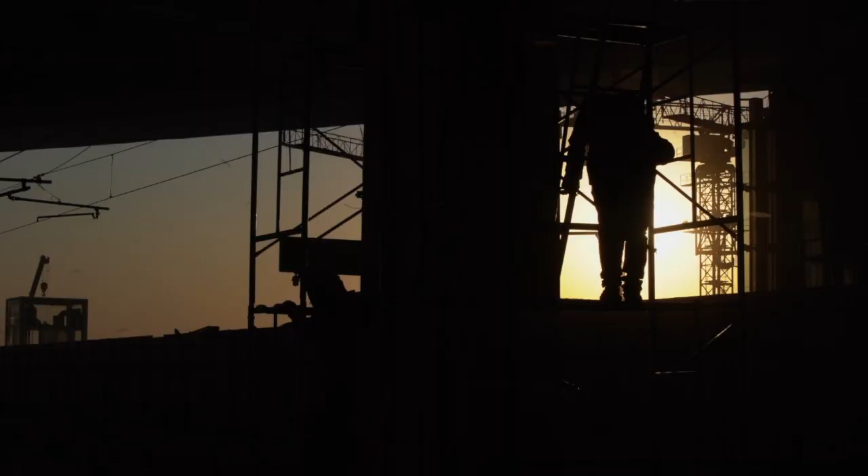Using manufacturing and creating new materials are how we build and reshape our planet.

For Jiangsu province in the center of China's east coast, water is a lifeline. When the Nanjing Yangtze River Bridge was built, it became a part of Chinese history.

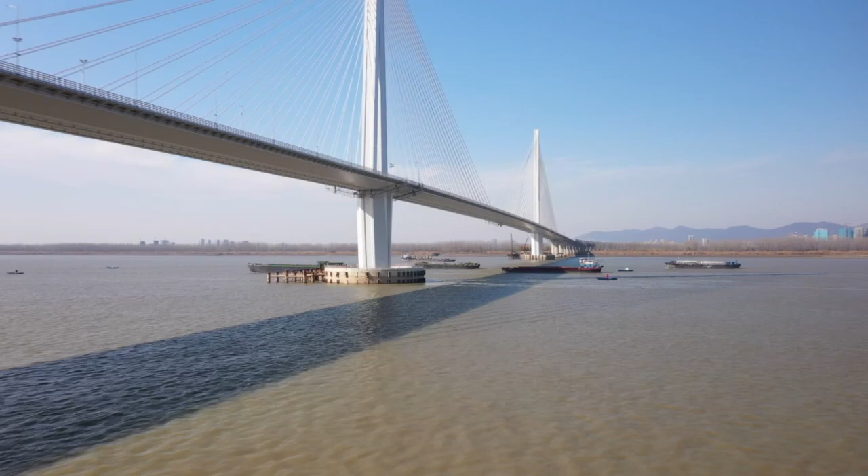13 kilometers away, the recently built Nanjing Jiangxinzhou Yangtze River Bridge set a new record. With a main bridge stretching for 1,796 meters, it is the longest steel-concrete composite cable-stayed bridge in the world.

The massive span means strict load limits had to be set. The bridge had to lose half of its weight to achieve a perfect combination of mechanics and aesthetics.

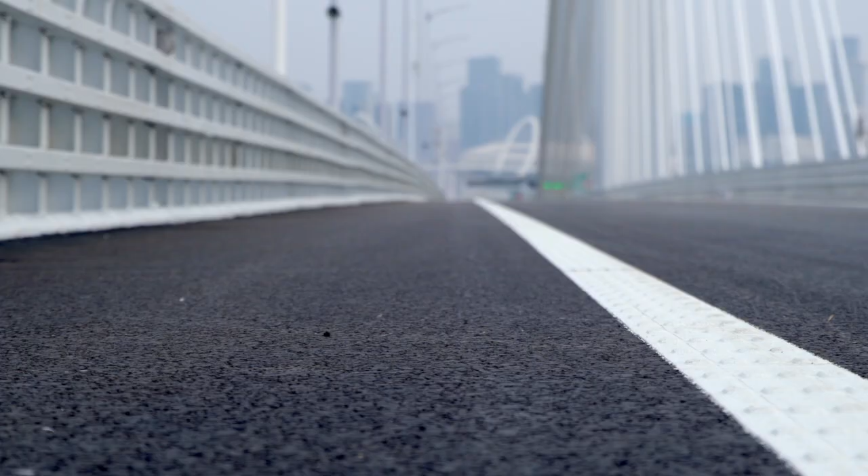The new material weighs 2.65 kilos and is now being tested to determine its maximum bearing capacity. The engineers are challenging the impossible to find out exactly how much weight the bridge needs to shed.

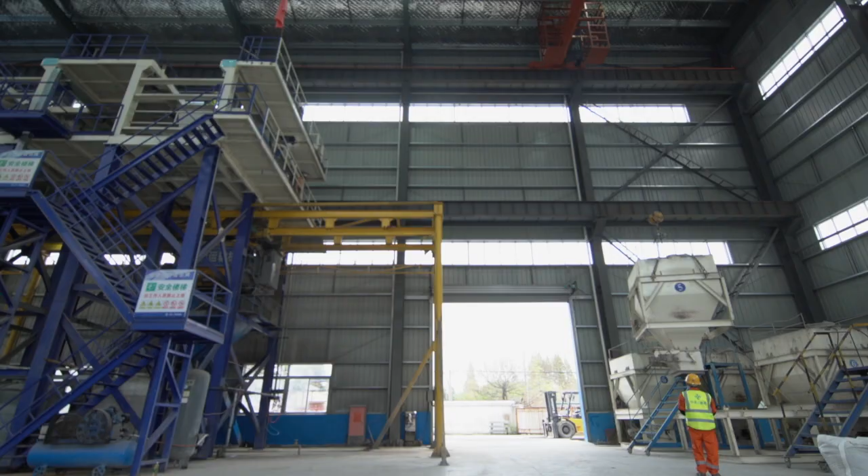Behind every engineering feat is a concrete processing factory just like this one. Over 100 years ago, the invention of concrete led to a worldwide revolution in construction materials. This was followed by a boom in infrastructure, which was considered an indicator of a country's development.

Today, concrete is the driving force behind China's construction surge, and that, in turn, gave rise to a new type of concrete material.

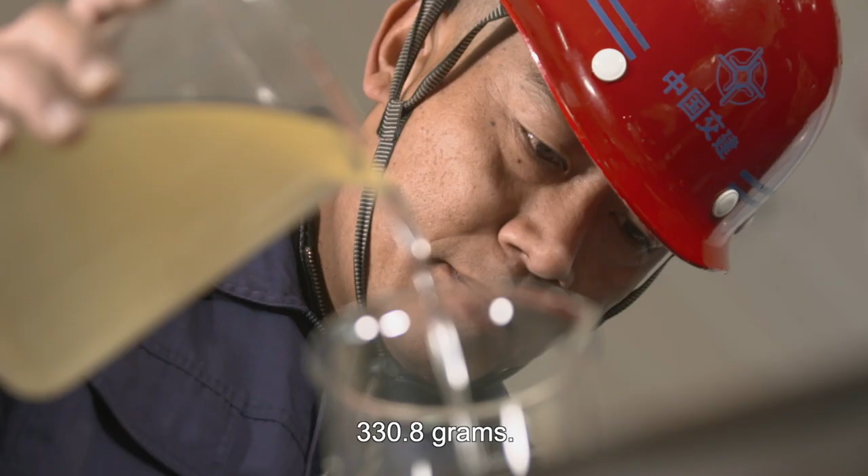Reactive powder, steel fiber, fine sand, gravel, and other materials. The R&D staff have found the exact ratio needed to reduce the bridge's weight.

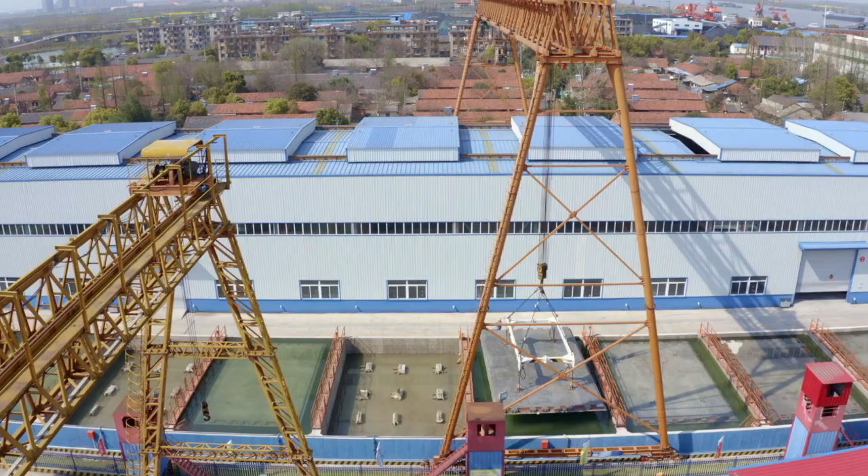A prefabricated section of bridge deck 11.3 meters long and 6.9 meters wide is produced using the new aggregate reactive powder concrete.

After being preserved in water for 15 days, it will be left to dry. Compared with traditional concrete bridge decks of the same size, each section of this new type deck weighs only 45 tons as opposed to 70, and its thickness has been reduced from 28 centimetres to 17 centimetres.

The sections will be gathered, connected and spread out to build a passage to the future. This is a new beginning.

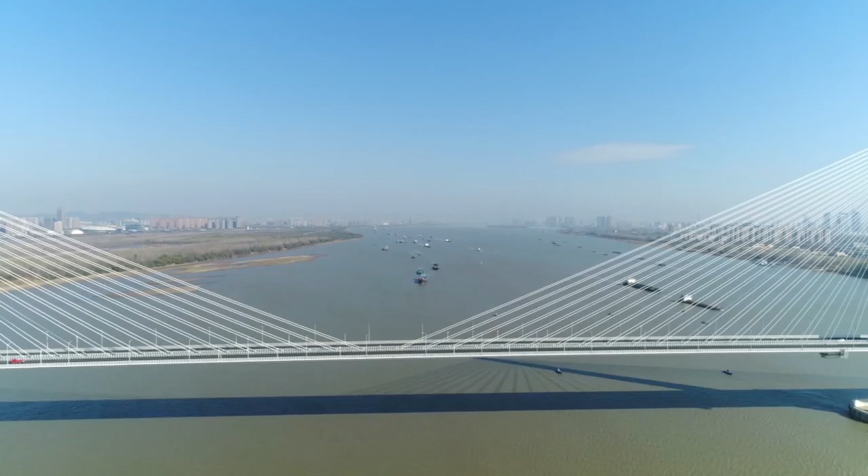494 sections of the new material deck are hidden between the steel box beam and the asphalt road. Stronger materials enable greater capacity. In this case, it means the bridge can be made lighter by a staggering 15,000 tons, 40% of its original weight.

The now much more slender Jiangxinzhou Yangtze River Bridge is about to undergo a bearing capacity test, a kind of birth checkup.

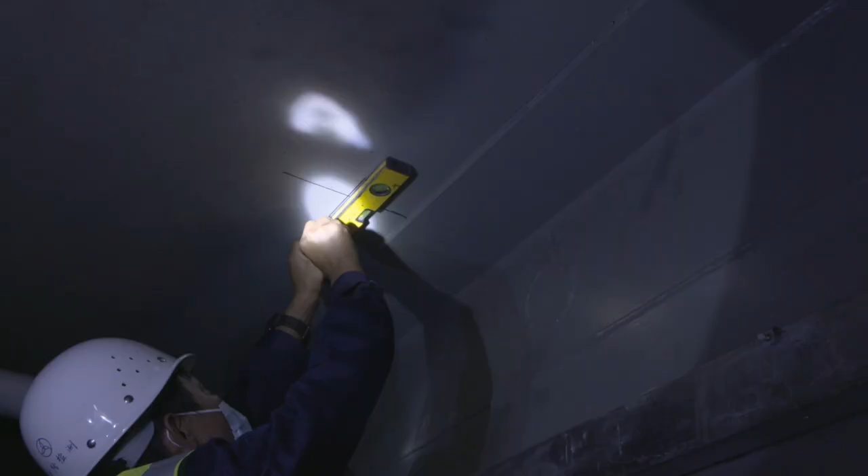244 stress points will enable us to see instant changes when stress is applied to the bridge during the bearing capacity test. Every tiny detail regarding the new material's performance will be tested.

Preparations for the test begin. A total of 38 heavy trucks, each carrying a 40-ton load, are ready to roll.

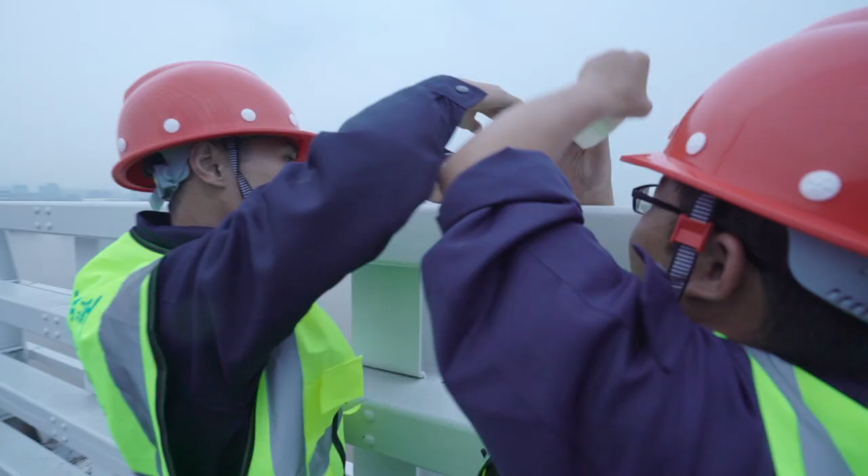Wind speed monitoring, position observation, cable force tests. Every change on the 4,134-metre bridge is being recorded and monitored down to the millimetre.

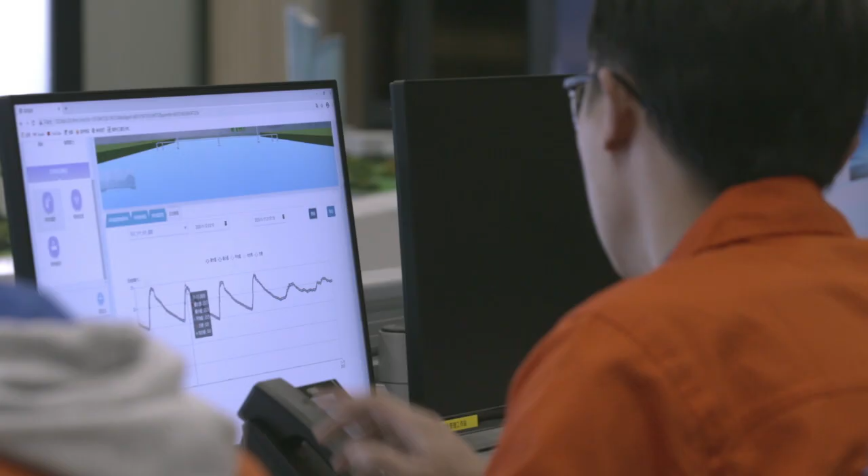Today, the Bridge Health Monitoring Centre goes into operation for the first time. During the bridge's anticipated 100-year lifespan, its every breath and heartbeat will be monitored here round the clock, all year round.

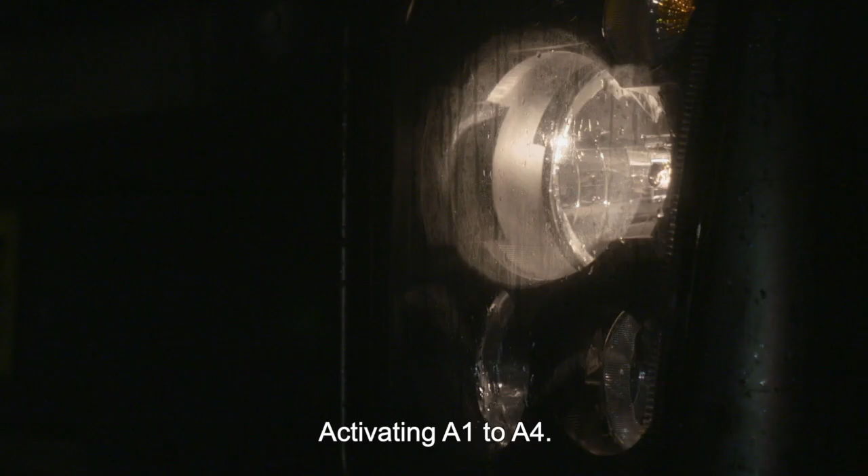The 38 trucks move to the middle section of the bridge. The total weight is 1,500 tons, equivalent to 1,000 cars passing through at the same time.

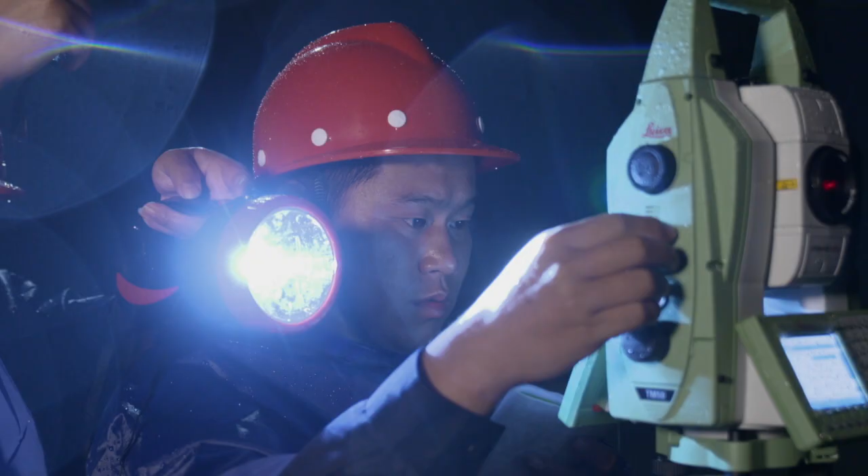In an extreme bearing capacity test like this, each new load puts more pressure on the bridge. This will cause it to bend downward and create tower deviation. Data measured on site needs to match the calculations to ensure the bridge passes the test. Only then can it be put into operation.

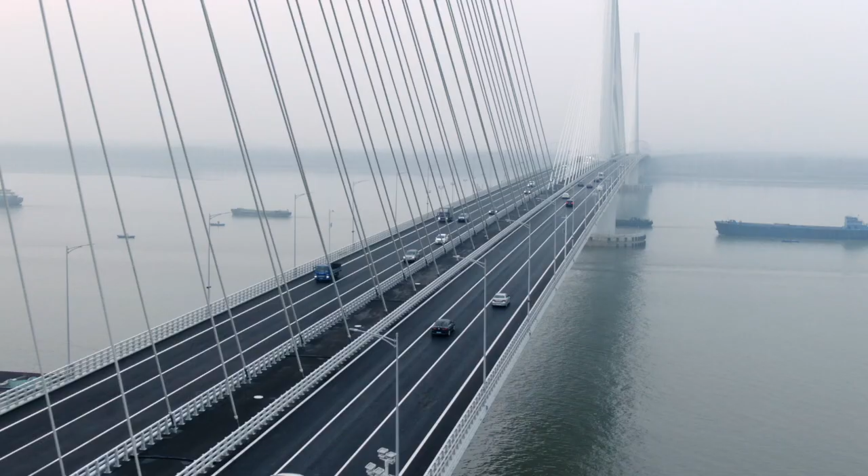From this moment on, the bridge begins to fulfill its century-long mission. Nearly 200 bridges built over the Yangtze River in the better part of a century have led to the creation of a highly efficient transportation network in China, boosting economic ties between the country's south and north. The bridges over the great rivers are a crowning achievement in China's development.

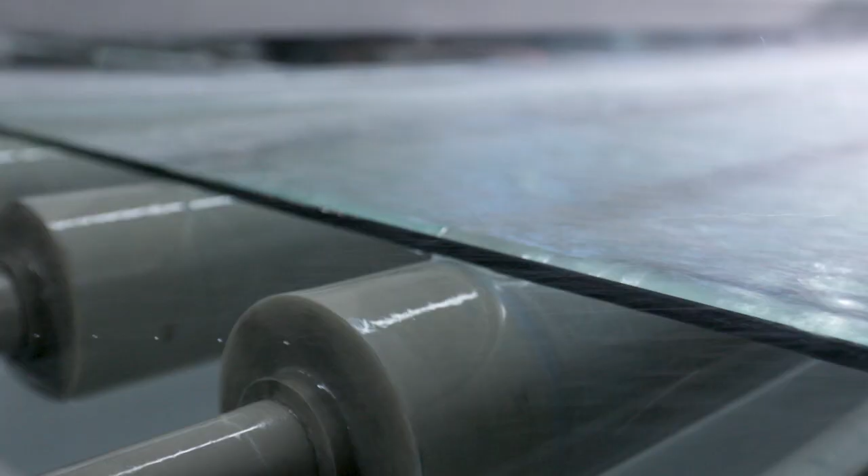Glass, a material almost as old as human civilization itself, reflects the passage of time like a prism. Over the last 200 years, the use of glass in architecture has created more possibilities in bringing natural light into living spaces.

The sunbird is the symbol of the 1,000-year-old city of Chengdu. It was unearthed as a 0.02mm thick artifact from 3,000 years ago, and it's now being showcased to the world at a major international sports event.

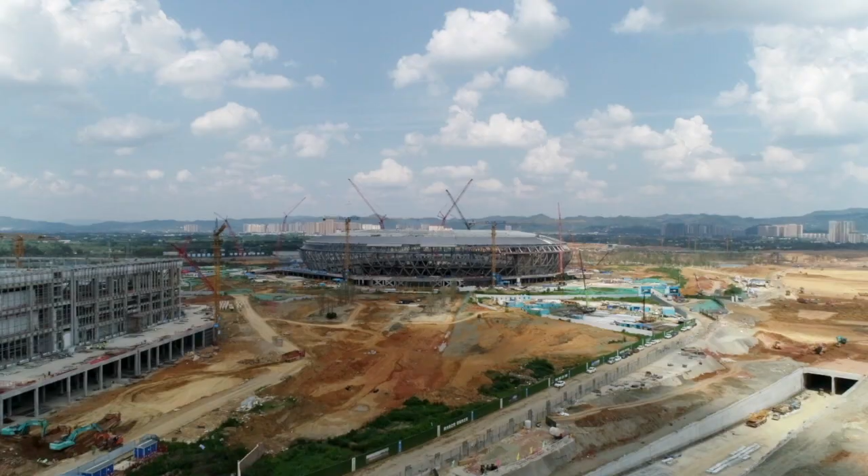The 40,000 capacity Dong'an Lake Sports Park will be the main venue for the 31st Summer Universiade. Its outline is gradually taking shape.

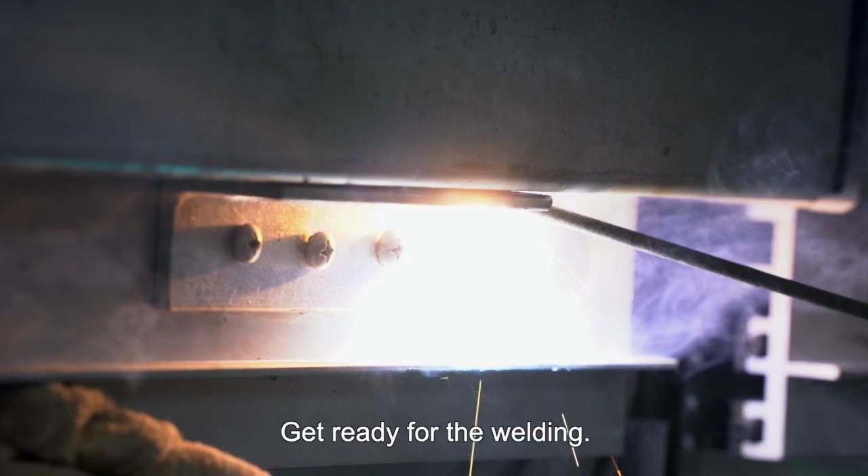The stadium is in the shape of a giant flying saucer. Workers are now installing a 6-metre glass piece that will serve as the saucer's porthole. Atop the skylight of the stadium, workers will use 12,540 pieces of glass of various sizes to enlarge a tiny sunbird by 2.7 million times. The result will be the largest sunbird logo in the world and a spectacular sight from both below and above.

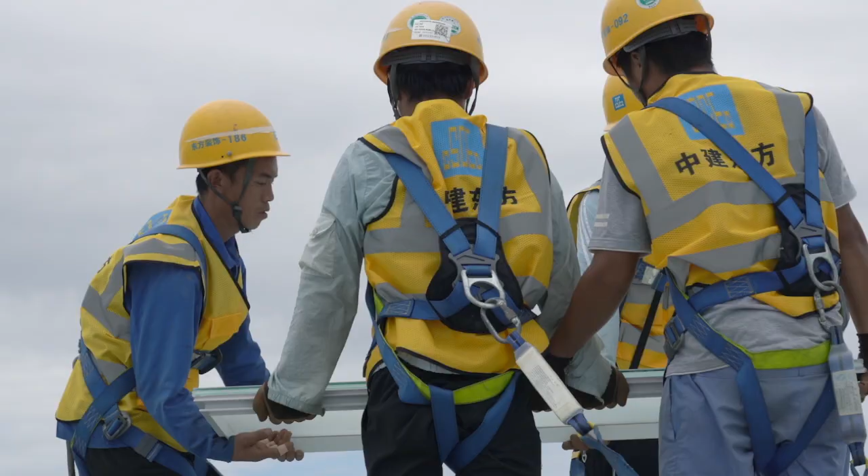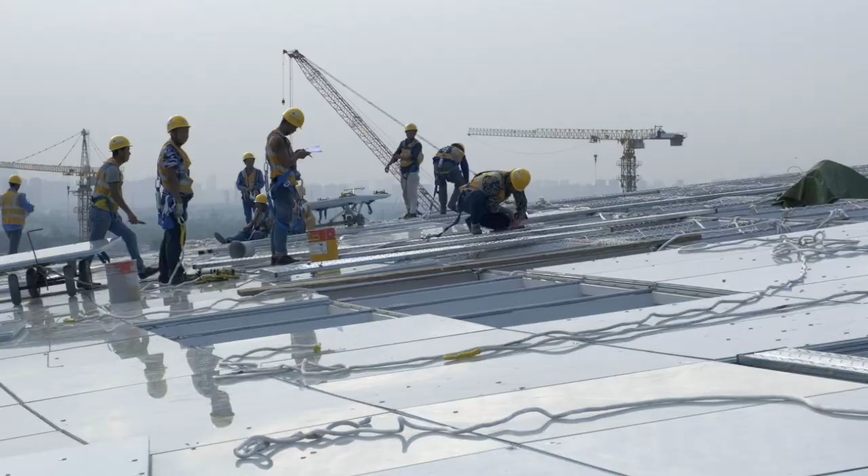Every piece of glass is precisely numbered, then put in a designated spot. Operations in all sections are carried out simultaneously, a method that's both efficient and error-free.

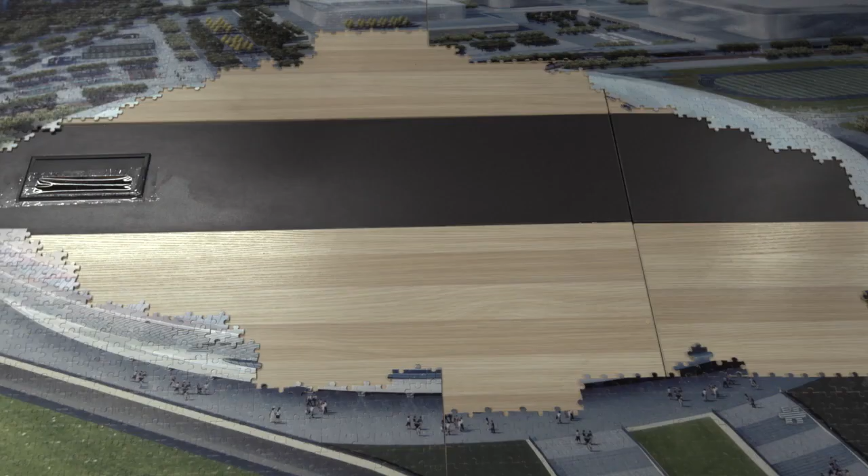12,540 pieces of enameled glass have now been installed. It took 35 days and was completed with a 99% precision rate. The Sunbird is finally airborne thanks to the labour and wisdom of the team. This sophisticated building technique will bring infinite possibilities for future construction projects.

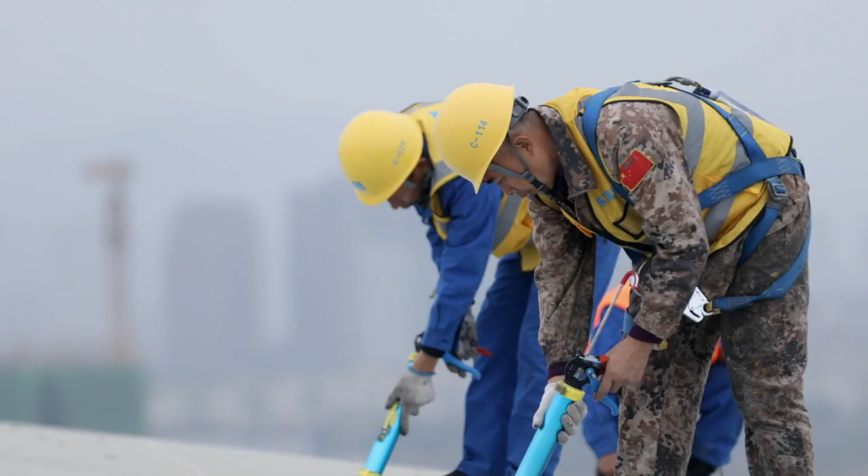Now comes the final test. Chengdu is a city of year-round humidity and constant rain. The 27,000 square metre skylight needs over 40,000 metres of glass cement. As well as guaranteeing the pattern's lighting and display, the roof must also be waterproof. Every single seam on this gigantic skylight will be tested.

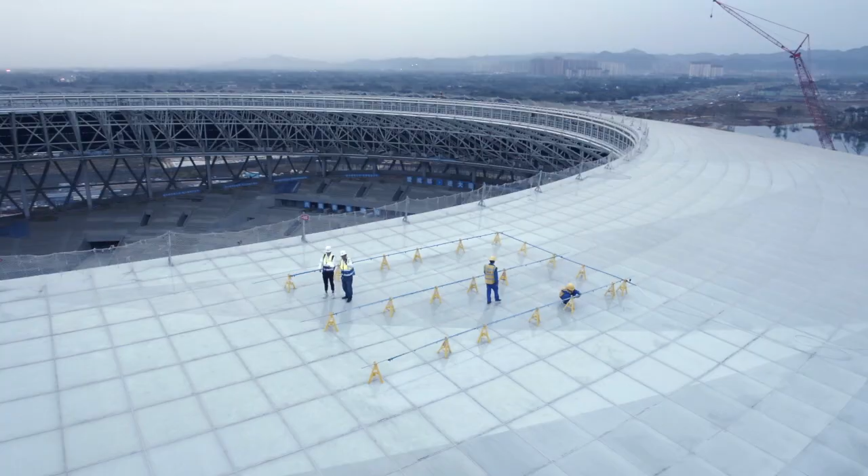The 24-hour water pouring test comes to an end. The roof did not let one drop of water through.

After being blown up to 2.7 million times its original size, the Sunbird, a symbol of Chinese cultural heritage, comes to life again. More than 3,000 years on, a miracle is reborn.

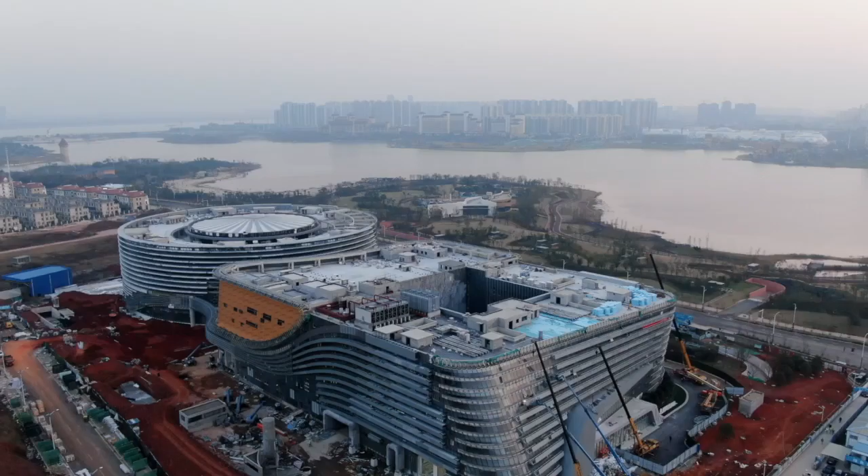The same sky the Sunbird flies across is also witnessing other miracles. At the Nanjing Civic Centre, glass is being used to keep the city's 1,000-year-old poetic beauty alive. Construction is now at a critical point.

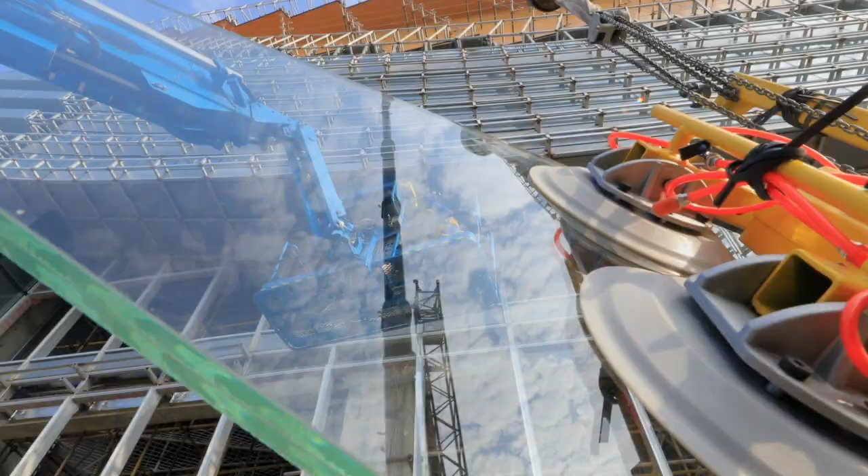In order to give the structure a flowing quality, builders used almost every type of glass curtain wall currently available for this installation, which has no previous example to model itself on. Breakthroughs in modelling technology and construction techniques made it possible to finally realise this bold design that had been shelved for 7 years.

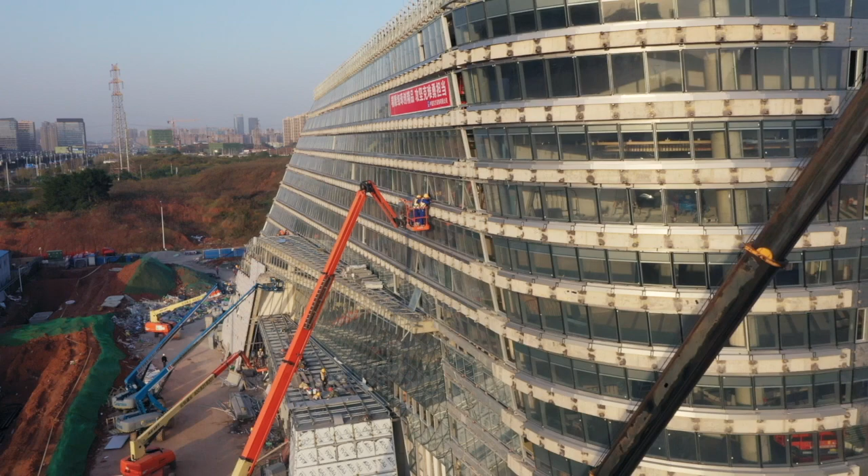The builders will use a total of 8,255 pieces of glass to assemble the exterior, involving 7 systems, 25 designs, and 5,525 sizes of glass materials. The complexity of the installation is growing exponentially. Next, they will attempt something that has never been done before, making 180 tons of transparent glass float above an empty space inside the building.

With a stayed structure, load-carrying points are created in the air. Glass is then attached to these points, creating the illusion that it's floating.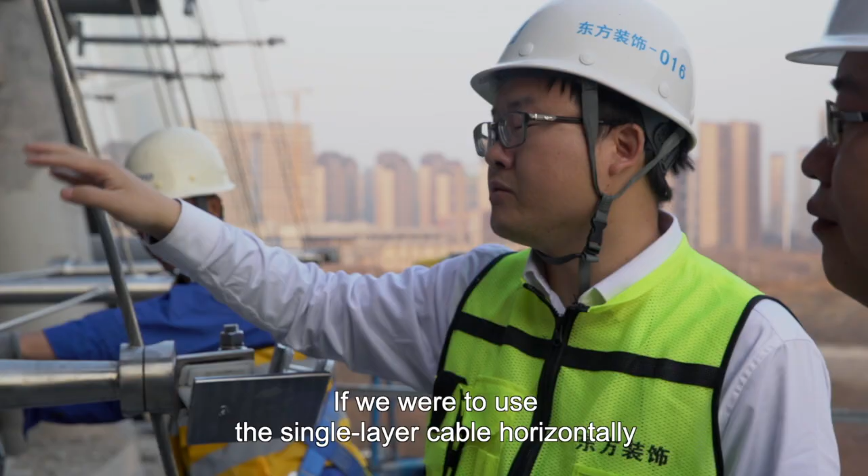If they are to achieve that transparent and flowing quality, the builders can't use thick cables with a simple structure. They must instead take 625 thin ones and weave them into a net as if using needle and thread, turning each intersection into a load-carrying point for the glass.

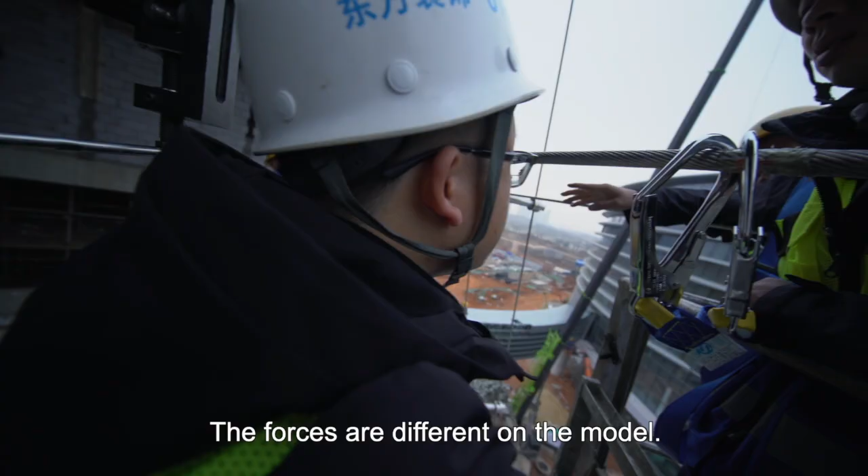The entire net contains 688 load-carrying points, allowing a margin of error of less than 5 millimeters. The engineers continue adjusting it to make sure it's accurate.

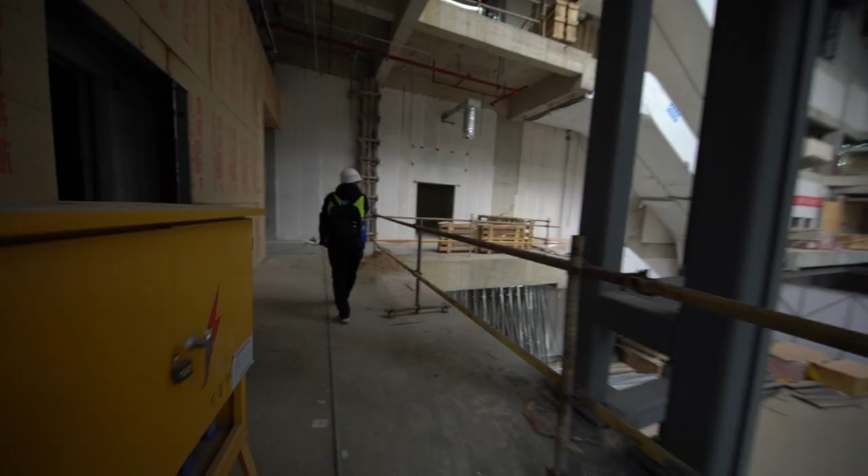After the structural stress is precisely calculated on the computer, can they determine the positions of the fixtures?

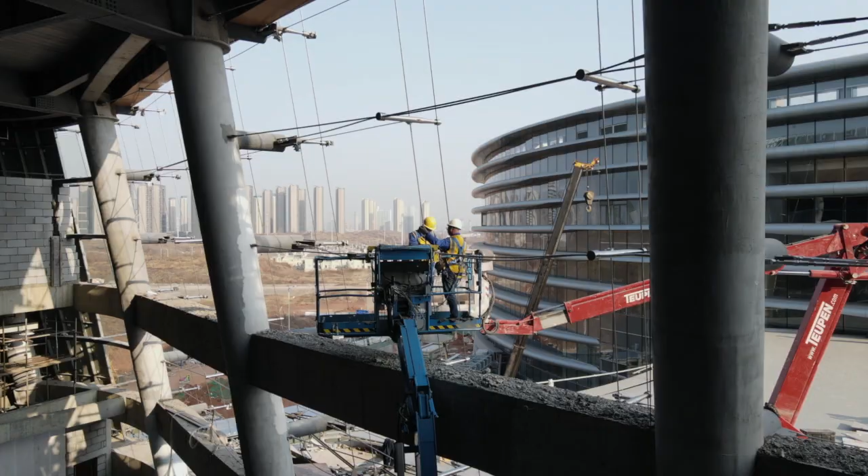Next, the builders will run a tension test to see how each cable performs in the loading state.

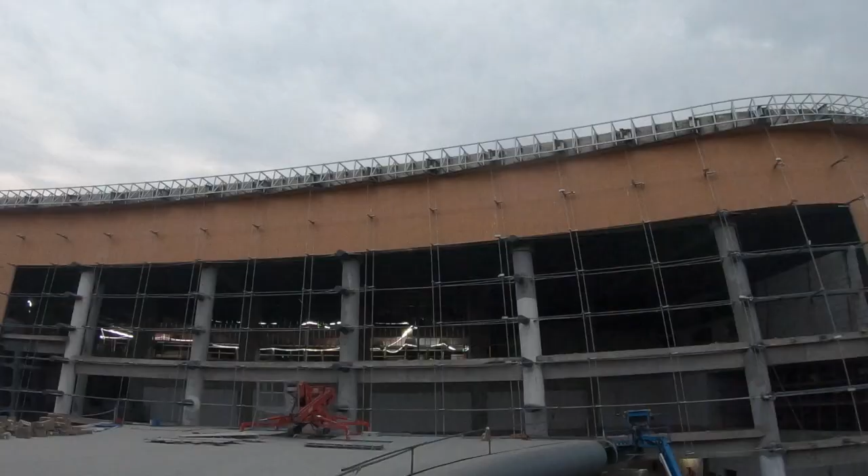The stress on every cable is within the calculated range. The net has achieved its balance. This means installation of the glass curtain wall can begin.

180 tons of glass will be installed piece by piece, according to the load carrying order.

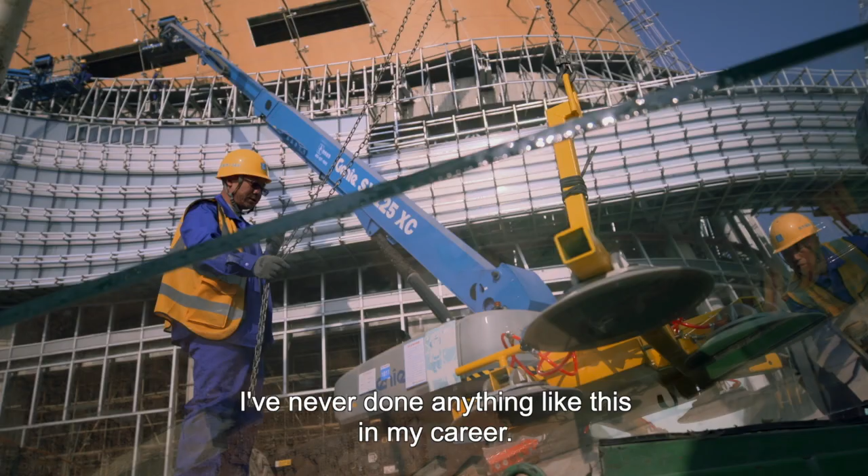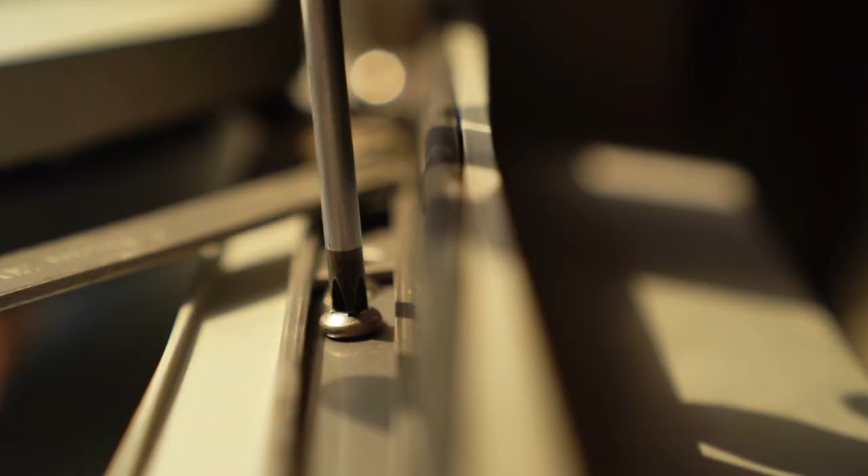These ultra-transparent laminated pieces of glass each weigh about 500 kilos. They will replace traditional exterior walls, and they'll be able to withstand all types of bad weather. Breakthroughs in materials and techniques like this will produce more energy-saving, efficient and smart buildings in the future.

As the sun sets behind the Nanjing Civic Centre, its brilliance inspires new poetic creations for the city as it heads into the new millennium.

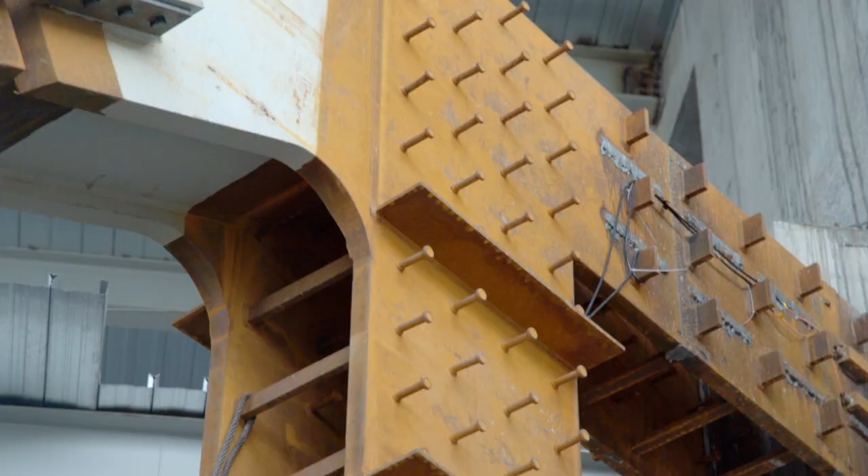Here in Chaotianmen Square, 8 250-metre skyscrapers rise from the ground. The frame for this complex is a 100,000-tonne structure made of steel. This remarkable project raises the city's skyline to become its latest landmark.

The next big challenge will be the finishing touch for the complex. At a height of 250 metres, builders will construct the world's largest horizontal tower.

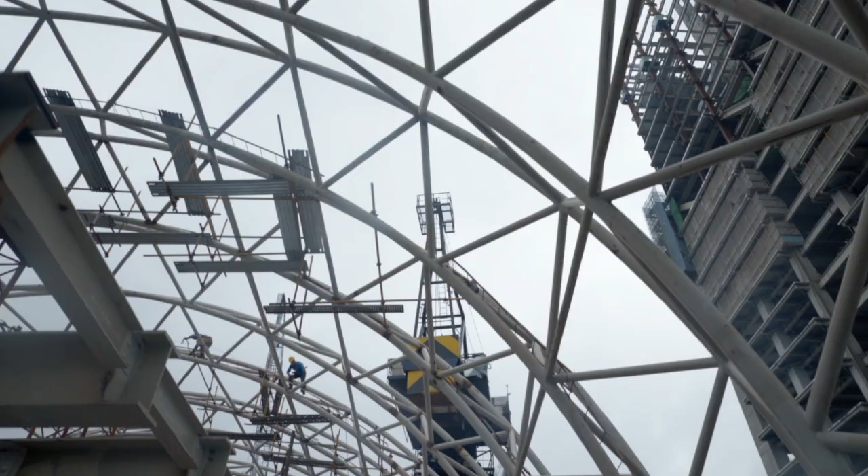The builders will use 16 mega-sized hydraulic hoists to deliver the 3,000-ton steel structure to the skyscraper at a height of 250 meters in 3 batches.

那个油缸往下缩的时候会有一点震动，然后上提的时候是比较稳定的，是没有的。 The 1,000-ton steel structure rises slowly between the towers, just 60 centimeters away from the building at the narrowest point.

If there's a collision, the consequences could be catastrophic.

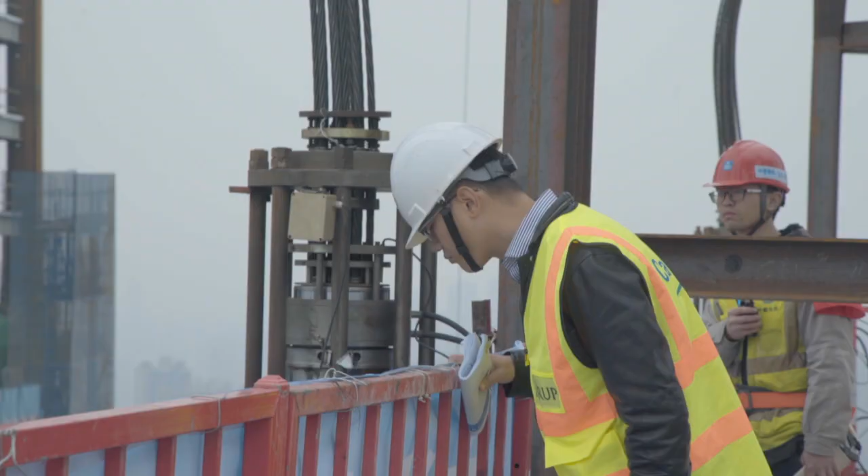Chaotianmen is located at the intersection of the Yangtze and Jialing rivers. This means crosswinds between the towers will pose the biggest challenge to construction. The builders must complete the elevation during a brief window of calm weather.

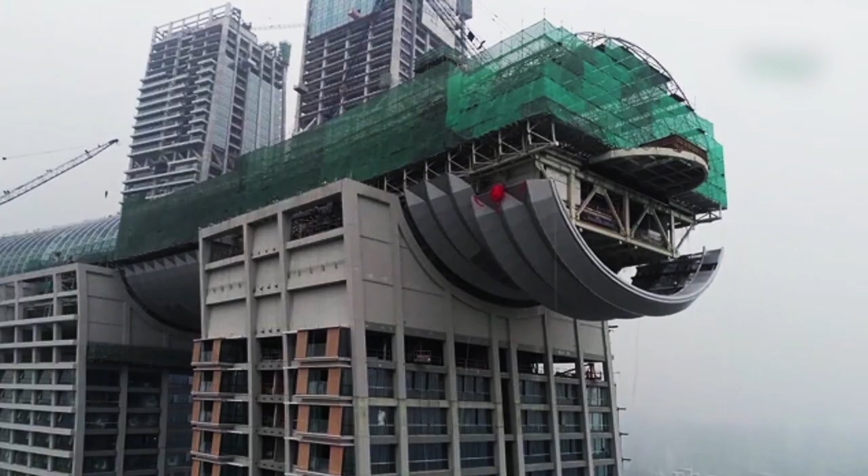After 20 days and nights of intricate work, a 300-metre long crystal corridor made of 12,000 tons of steel is finally put in place. This horizontal skyscraper has a record-breaking length and height. It's an amazing achievement in the history of architecture.

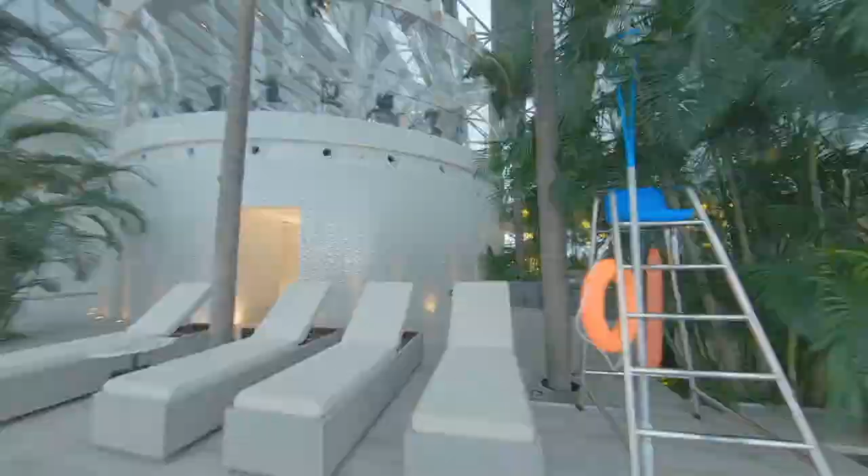This is the world's largest horizontal skyscraper, covering an area the size of 8 standard swimming pools. This steel structure corridor stretches for 300 meters. It's like a mid-air ocean floor.

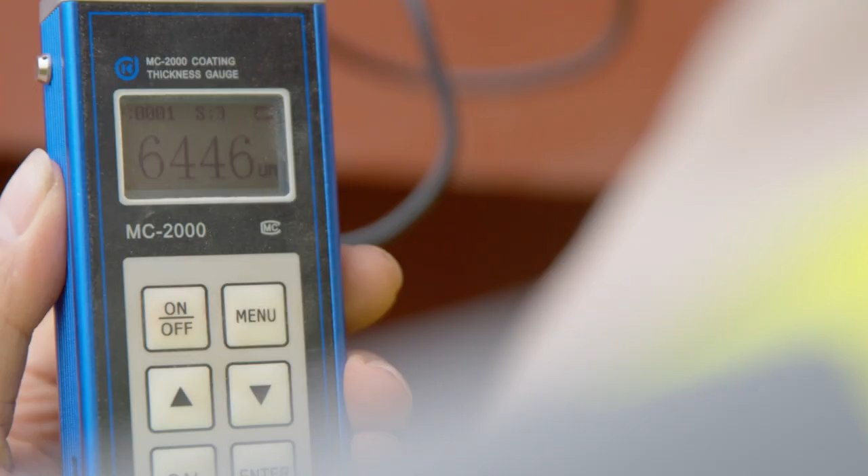Nearly 40,000 custom-made steel components of different shapes and sizes serve as the bones for the city's growth. Super high-rise buildings are considered an important indicator of a country's technological level and comprehensive strength. They are also the yardstick against which its steel structure techniques are measured.

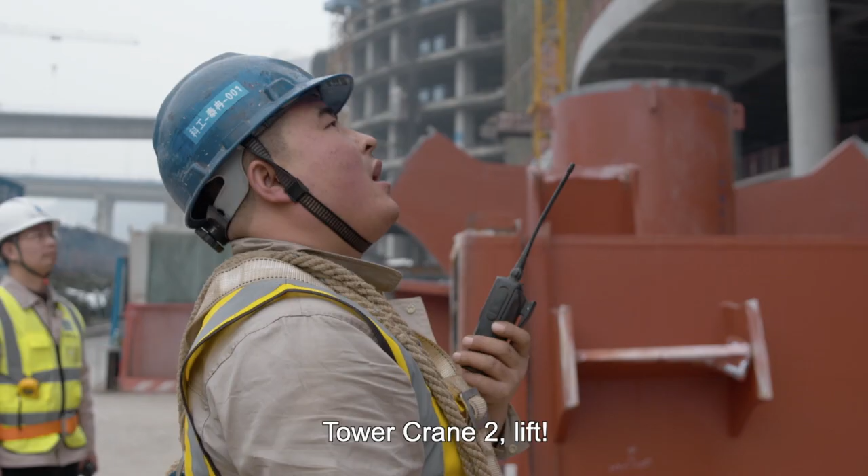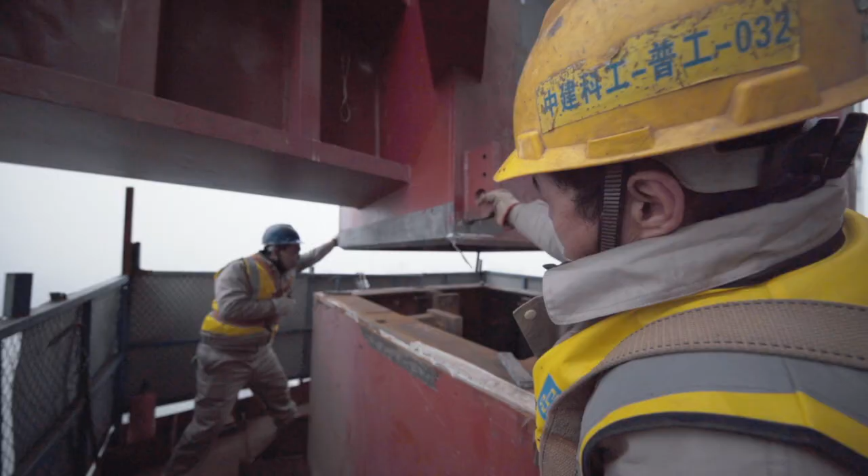18 steel bones grow upwards piece by piece. But as the height increases, so does the difficulty. The builders must keep the deviation of docking to under 5 millimeters to prevent accumulated errors in subsequent procedures.

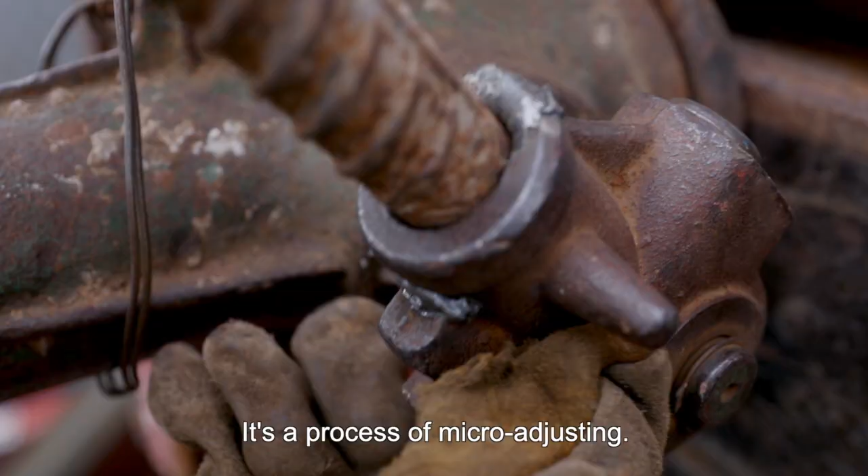With docking completed, the welding begins. Today, seam welding is the dominant welding technique used for steel structure buildings. Welding in mid-air has strict requirements. The welders must work without pause, because interruptions could result in impurities in the seam that would compromise the final quality.

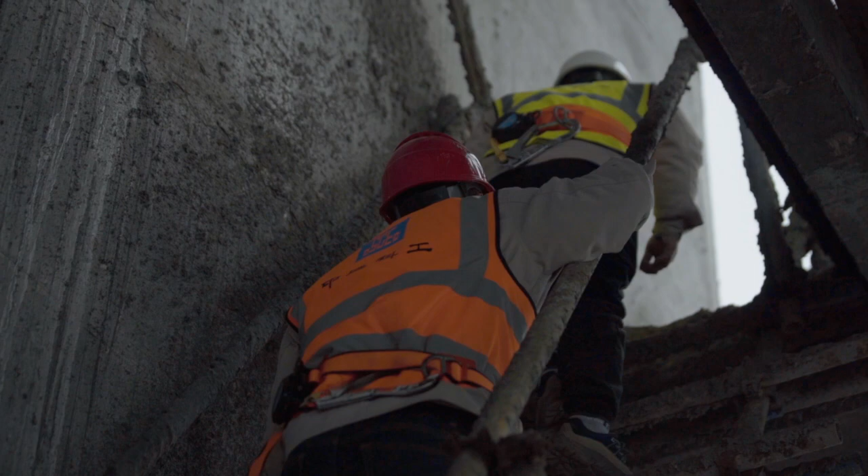40,000 steel frames require a massive amount of work. In a cross-section area of less than 3 square meters, workers must complete 30,000 meters of butt welds, equivalent to the height of about 4 Mount Chumulangmas. It seems that they're mountaineers as much as they are builders.

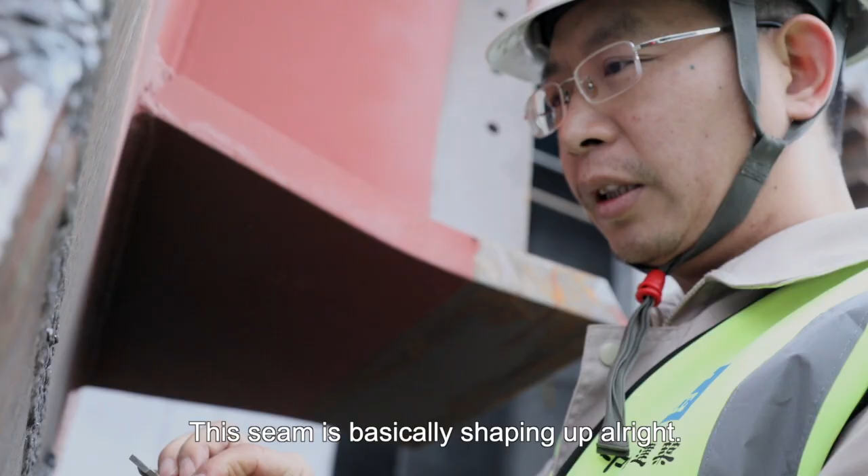The 458-meter skyscraper grows 1 story taller each week, breaking the city record along the way. Mankind has been using steel structures and buildings for centuries, reshaping the world as we know it. Steel is strong enough to support high-rise towers and long-span bridges. But more importantly, they lay a solid foundation for a country's industry.

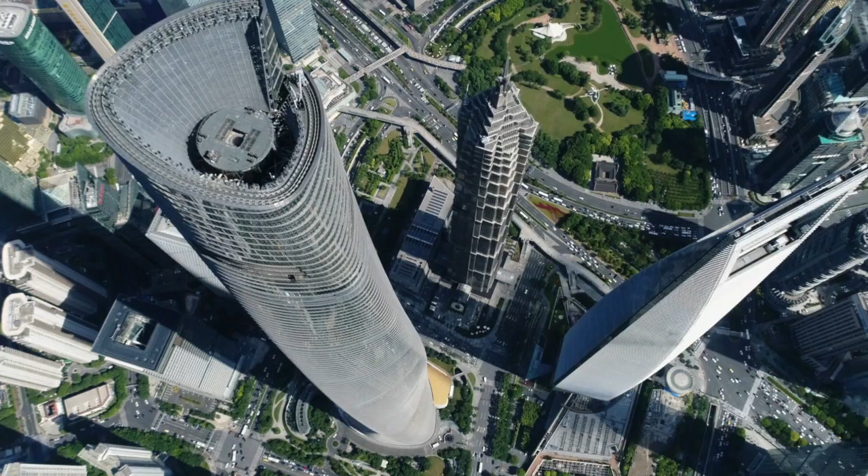A new batch of steel components is being developed and produced, promising new growth for the city.

Steel is the very foundation of industry. Over the past few decades, China has gone from suffering steel shortages to having world-leading industrial production capacity. Made in China, created in China, built by China. The nation is being continuously reshaped.

This is a city of the future in the making. China continues its efforts to climb to new heights and challenge the impossible. Xiong'an is the starting point of a millennium-long master plan, and it's witness to the dawn of a new age.

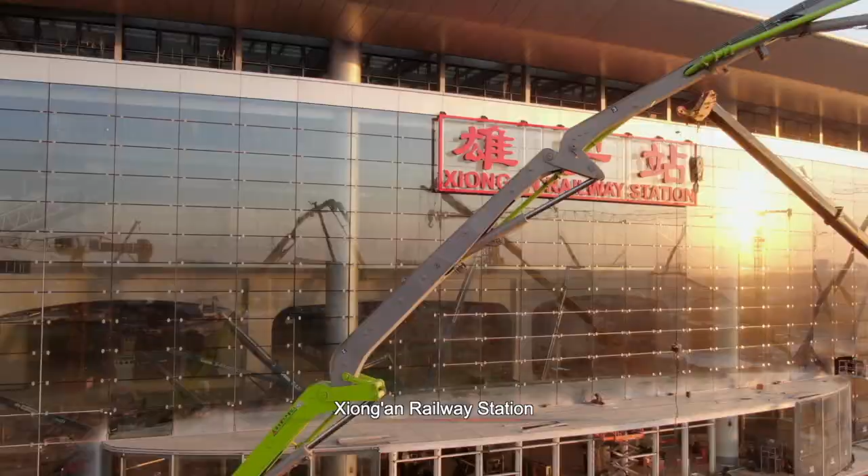The largest high-speed train station in Asia, equivalent to the size of 66 soccer fields, is about to open for operation. An unprecedented journey has begun.

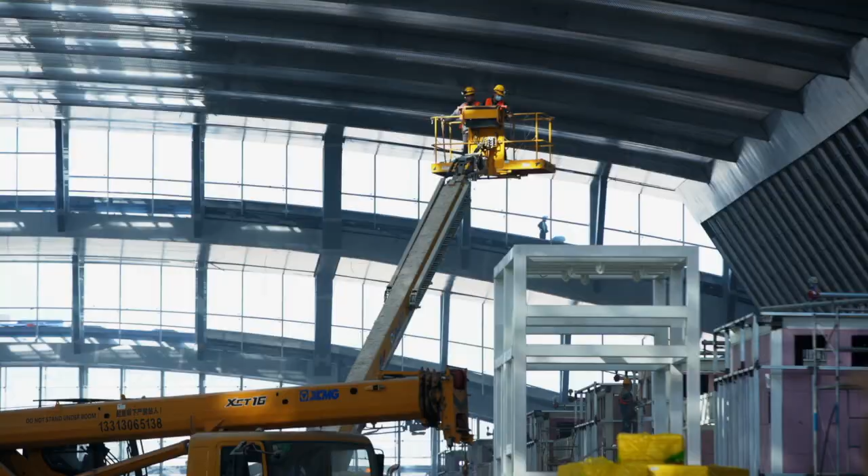Turning the rough texture of steel materials into something smooth enough for display and getting rid of all external decoration presents a new challenge. The use of cutting-edge steel material technology is a path to the future.

Every revolution in wide-spanning architecture is made possible by choosing the right material for the space. At Xiong'an Railway Station, a 78-metre span is achieved by using 400 steel beams. In the waiting hall, which covers an area of more than 20,000 square metres, not one column is used.

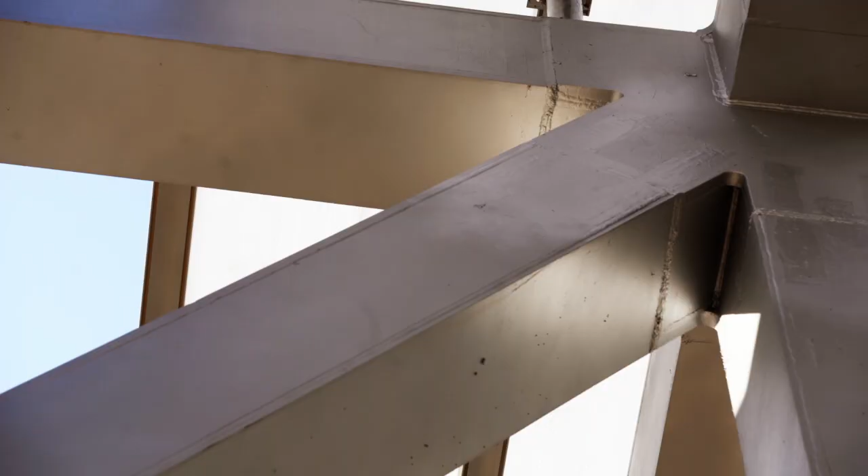The entire load is supported by pillars scattered around the platform. This keeps the amount of steel used to a minimum and makes maximum use of space.

This is where the Beijing to Xiong'an, Tianjin to Xiong'an and Shijiazhuang to Xiong'an arteries merge. In the future, this station will serve as a central junction of 16 routes going in all directions on China's massive high-speed rail network.

Massive building projects are scattered throughout the history of Chinese civilization.

And in Xiong'an, a new epic for the next millennium is taking shape.

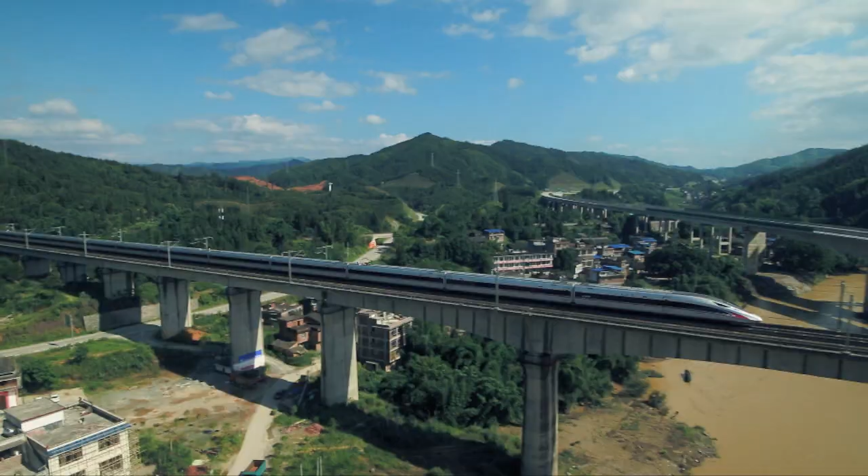Throughout history, the Chinese people have always been striving to make it to new destinations. This time, they're on a ride to the next millennium. First stop, Xiong'an.